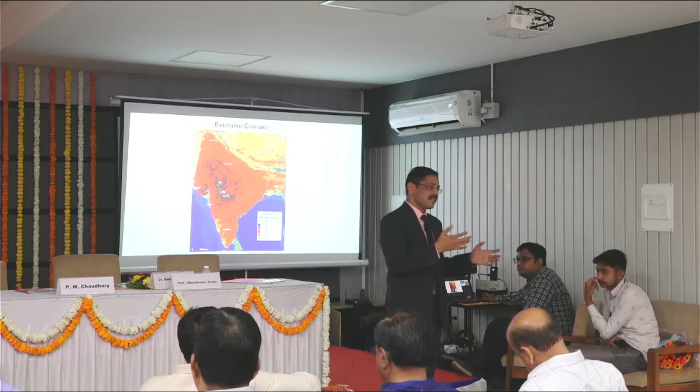In fact, the temperature is going even up to 60 degrees Celsius, and air temperature in Gujarat may go even more than 42 or 43. How do we tackle that? That is an important thing. And you must be seeing this kind of failure in many places. The road has been constructed, and within 2 or 3 years you may see the failure has come up.

And if you ask the reason why it has happened, if some of you are involved in the construction of the pavement: overloading has caused this issue, the subgrade is a problem, the contractor has not done a good job. There are 100 things you can blame and not find the answer at all. But we need to figure it out. What exactly happened in these 2 months? What has happened to this road? You may see the crack. The pavement looks good, but it has cracked. We have invested 100 crores, but again we have to invest within 1 year. Again you pump more money. Again the material cost, resources, manpower, funding, budget, policy, everything will change.

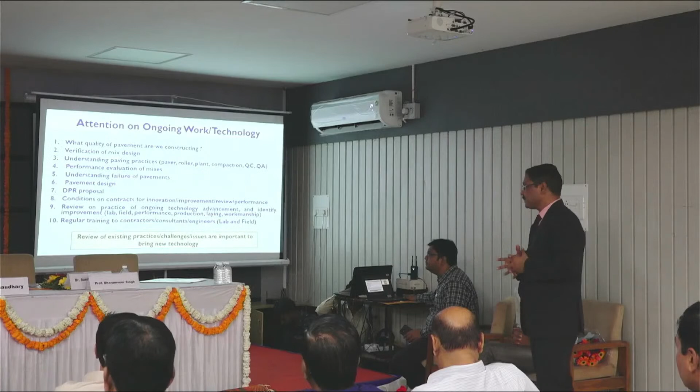This is what we have to understand - what quality of pavement are we constructing, and the verification of the designs and implementation part.

This morning I was having a discussion with one gentleman, and we were thinking everything is going as per the plan, but reality keeps on changing. The ground realities are different, and there are a lot of issues, because the contractor has pressure - political pressure, time pressure, budget crunch, safety margin, cost margin - and everything has to be kept in balance. So you may find some compromise has to be done sometimes.

So what I will do is cover a couple of technologies to show you what's going on in road construction. Maybe you can pick some up and think about how to implement them - think about the implementation side. I will show examples that have been implemented on the ground.

There is nothing fancy being shown here, it's all in the paper - it is on the ground, we have been doing that. And I'll show you the benefits of those techniques. Many techniques are there, and I'm not going to cover everything. There are many techniques if you really want to construct good pavement, flexible pavement.

If you want to do concrete pavement, there are certain techniques. If you want to preserve the pavement, there are certain techniques. If you want to maintain it properly, there are certain techniques. If you want to use waste, recycle plastic, stabilization, there are certain techniques. If you want to do overlay, concrete overlay, flexible, there are certain techniques.

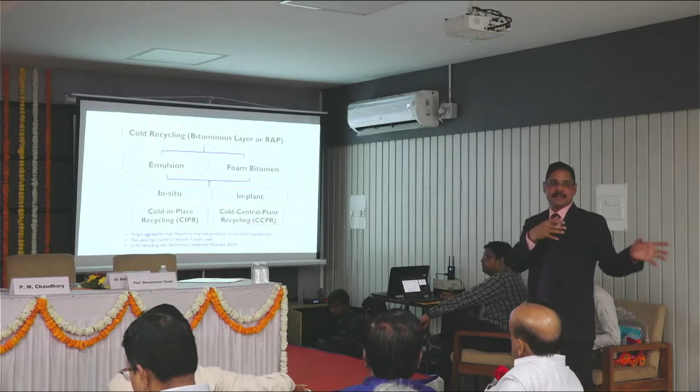This kind of road, no worries—I'll show a case study. This is a case study I got from the field. Usually you see a lot of roads like that, and what's the easiest solution? Just remove it, reconstruct it—forget about it, remove, reconstruct, bring new material and do the construction. Or you can construct an overlay on top of that. Or you can do recycling, which is what I'm going to show you.

This is one of the projects.

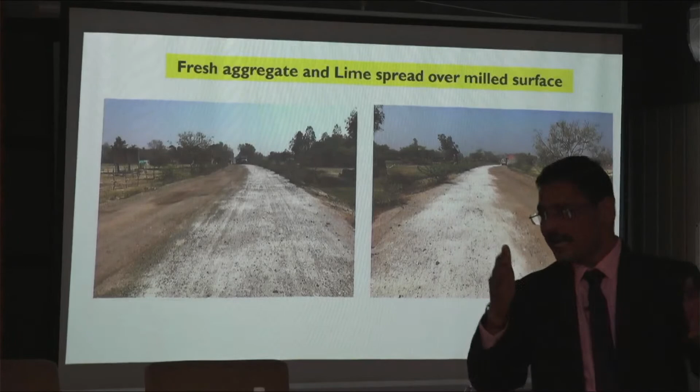You see the existing condition? So next, what we have done is spread lime and cement. It depends actually, but typically lime or cement are widely used. Cement plus lime combination, sometimes fly ash, sometimes lime, depends. Same road, the cement and lime have been spread. Existing road. We spray the lime, we spray the cement, and the dosage has to be designed.

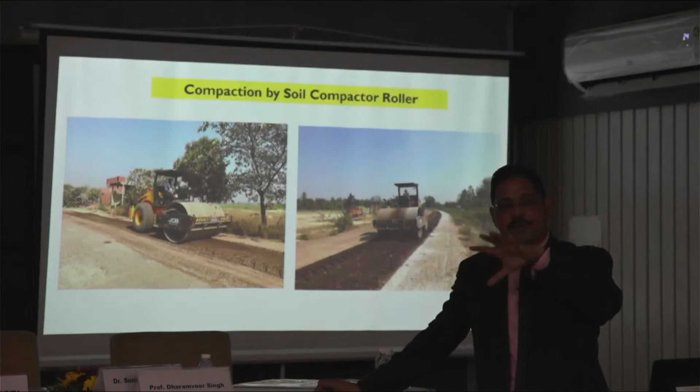And then once the milling has happened, you need to grade it. You need to use the grader just to make the profile, because the layer is coming on the top. Correct? And then you roll it. A big roller is required. You cannot use an 8-ton roller. A roller has to be at least 18 to 20-ton, because the mix is cold and you require big weight. We have seen people using 8-ton rollers or maybe sometimes other rollers - it's not going to work. Even though you are using the technology, you are not using the proper tool to execute it. So it's very important that you understand how to execute it.

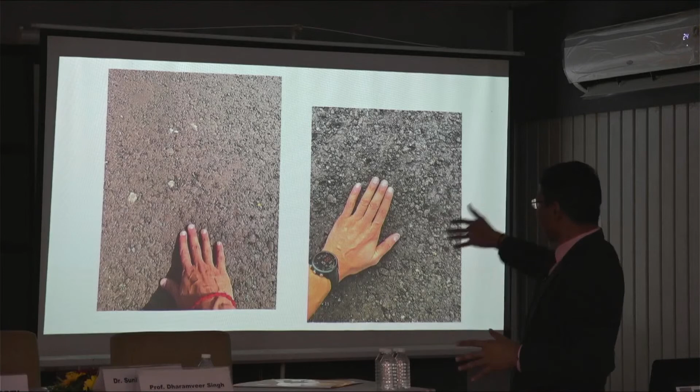Since there is an emulsion, if you see the left side picture, it looks little brownish in color, coffee color kind of thing. But after a couple of hours, it turns black. The emulsion breaks, and after the emulsion breaks, you can see the black color, and it looks like a brand new road.

And there is a material saving, a transportation saving, machinery saving, and everything. All these kinds of components are going to help you optimize the cost. Next, this is how things look like. After that, you put a thin overlay - maybe 30 mm, 40 mm, depending on the design - and your road is brand new. You have used hardly 10% new material, and you have used existing material as it is.

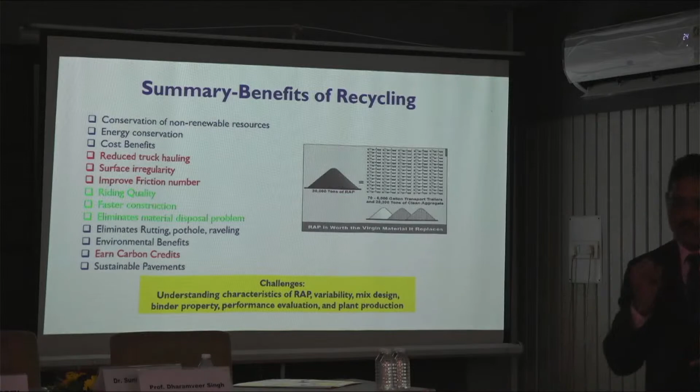So these are the benefits. If somebody is using recycled material, a lot of benefits are there - environmental benefit, cost benefit, material benefit, good roads, maintenance free. You can remove the distresses that are there, you can rectify all the causes for the distresses.

Okay, there is another technique which I am going to tell you about - stabilization. Remember, recycling is hot recycling or cold recycling. Stabilization starts from the bottom. You can do subgrade stabilization, you can do aggregate stabilization, and you can improve the quality of the material. Go next. This is what it is.

If you have a stabilized material, for example, there is unstabilized granular base, there is stabilized. Once you stabilize something, definitely the property will improve. You can add cement, you can add lime, you can add fly ash plus cement together, either in subgrade, or in aggregate, GSB, WMM, and you can improve the quality.

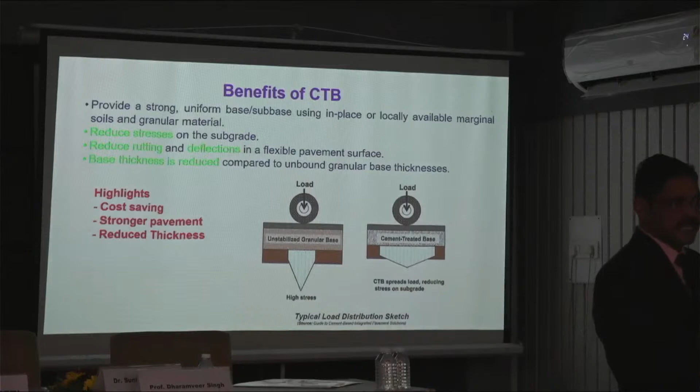Why does it have to be improved? Because there are certain benefits. The pavement is going to become stronger, moisture damage is not going to happen, cost saving is also going to happen, and it is in practice nowadays in India. Yeah, these are the benefits.

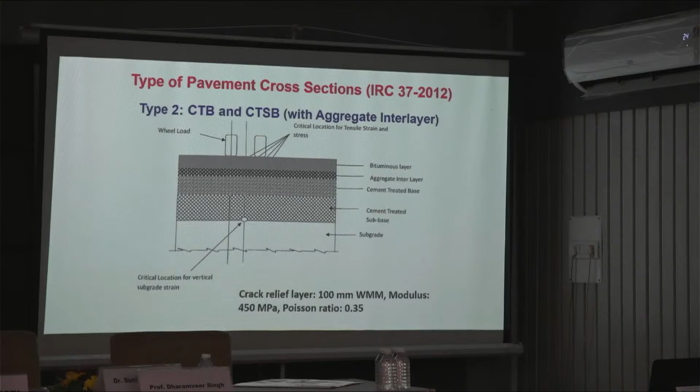In many places we have seen the water table is quite high. The water table is quite high, it goes into the subgrade and then GSB and then deformation happens. You can break that, you can cut it off. If you do good stabilization, quite possibly you can cut it off. So water is not going to come into the other layers because the capillary action has been cut off. Go next. These are the designs as per IRC 37/2012, but you can always design the pavement.

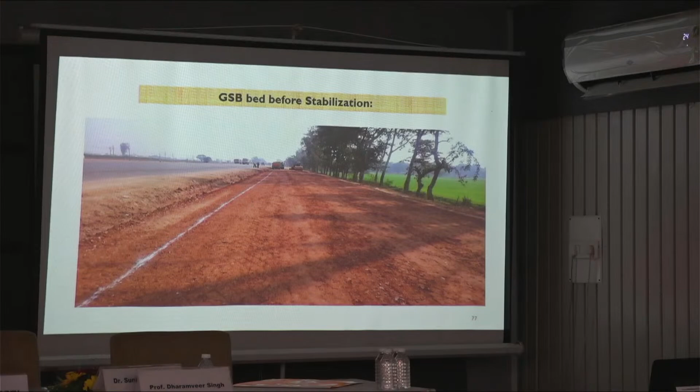This is one of the projects, again I will show the field example, where we have done it and how it has been done. That is more important, whether it is in practice or not. Go ahead. Again a similar kind of machine, this is GSB, granular subbase, which has been dumped on the side. Next, you spread it. This is the bed, this is how it looks. GSB, spread it, compact it.

Then you spray the cement on that, or lime, depending upon what kind of combination is going to work for you. This is how the cement has been spread. What we are doing here is stabilizing the aggregate layer. Why? Because we wanted to reduce the cost. Or your aggregate quality is not good. You wanted to improve the quality of the aggregate, in fact, the quality of the layers. Therefore, we require this kind of stabilization.

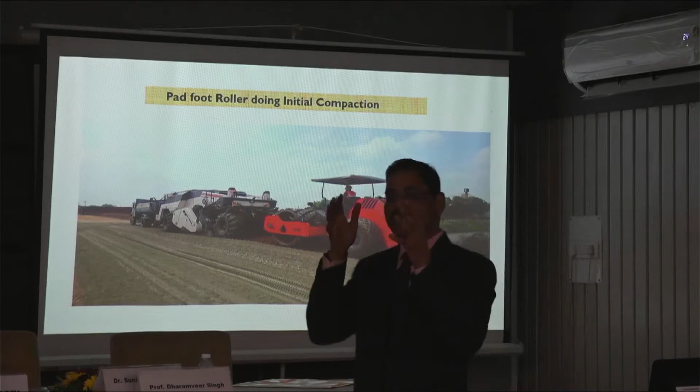Go ahead. Again, a similar kind of machine, in situ. You can do it in the plant also. It is not always in situ, because this machine is going to cost you maybe 10 crores. It's not necessary that you always do it in situ. You can always do it in the plant also, depending upon the logistics. You can use the WMM plant and all these techniques.

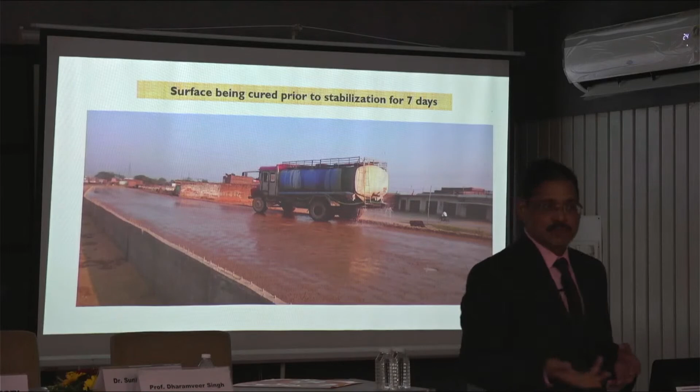Go ahead. Again, the grading is happening. Rolling. Again, the heavy compactor, you require 20 to 24 tons, so that it can compact properly. This is how the bed looks. And this is how you check the quality of the compaction or the layers. And how the curing has to be done, because there is cement in it. Around 2 to 3% cement is quite enough. But if you want it a little stronger, then the cement dose has to be increased. Maybe 4%, maybe 5%.

And this is how things look. Very strong layer. It's not going to deform. Very strong foundation. And on top of that, if you put recycled material, for example, if you have RAP material somewhere, you are saving here, you are saving there. A combination of recycling techniques can be used. In some projects, if you combine recycling techniques, you may save even 60% cost. But yes, execution is important, planning is also important.

Again, similar soil stabilization, go next. This is one of the projects I will show you, soil stabilization. Aggregate stabilization, now soil stabilization. Because sometimes the soil foundation is not good enough. You have poor soil. You cannot construct a good subgrade. We have to stabilize it. On some of the highways it is going on. See how the subgrade looks.

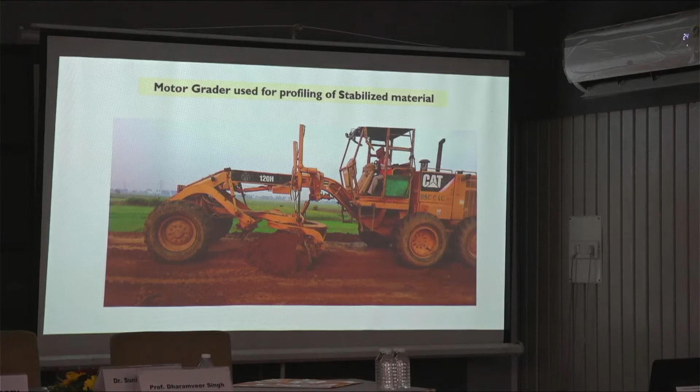Next, roll it, compact it, see how it looks. Your CBR improved, your moisture damage characteristics and strength improved, your pavement thickness has been cut down, your cost has come down, your life cycle cost is going to come down.

And you check the density. So next.

So what we have covered so far: recycling we have done, cold recycling in the plant, cold recycling on the site. Then what we have done: stabilization of aggregate layer, stabilization of subgrade layer. So we have covered stabilization and recycling. These are the two very strong pillars nowadays, and they can be implemented depending upon what kind of project you have. And whatever material is there, you can use 100%. There are some other techniques which I am going to cover.

By the way, I am not going to cover a lot of things on the white topping and short panel because Patanjali is going to cover that. He may tell me don't cover that, I will cover everything. So I will cover it a little bit briefly, but keywords. If you will cover that, I will be enriched. Yeah, a little bit. Yeah, go ahead.

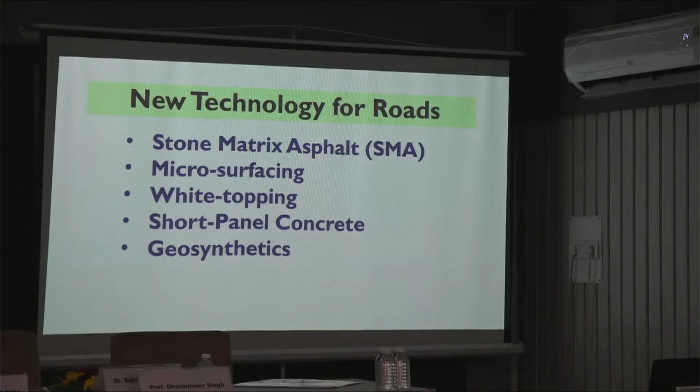By the way, many of you must have heard about this particular technique, SMA, stone mastic or matrix asphalt. If you have not heard about that, this is the time, because this particular mix or technique can help you if you really have rutting issues, or if you have moisture damage sometimes, and there is no option to go for the concrete road. Then this is the technique which you can also think about. Go next.

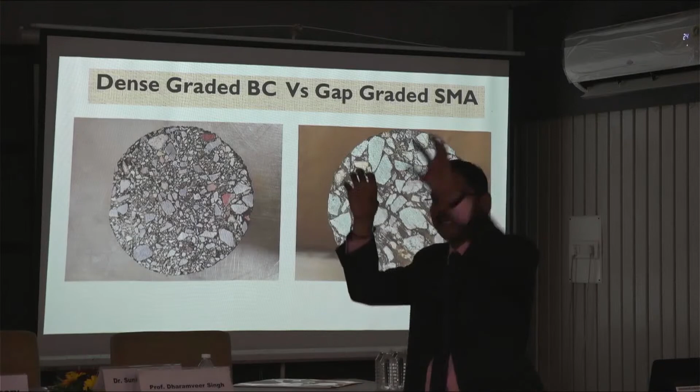In your SMA, all the coarse aggregates are coming together. And in your BC and DBM, one coarse aggregate is here, another is here, another is like this. They are floating in the matrix, but here they are in stone to stone contact. So once the load is applied on this one, there is a lot of chance that it will not deform. But here it will deform. So if you have heavy loading, high temperatures, high chances of rutting, then definitely SMA is a good choice.

And you can think about how to build a road. In fact, this is the practice now. Delhi-Vadodara Expressway, which is the perpetual pavement, the top layer is SMA. The Chennai-Bangalore Expressway, top layer is SMA. Another, Delhi-Katra, top layer is SMA. Nowadays, SMA has boomed. But we have also seen SMA being misused on many projects, and it also fails. So again, the technology alone is not going to help. Implementation is important. How do we implement that? So next.

There is a new word. Technology is not to be blamed. It is the intentions, how you apply it. Yes. Absolutely. Intention. Yes. And this is the example.

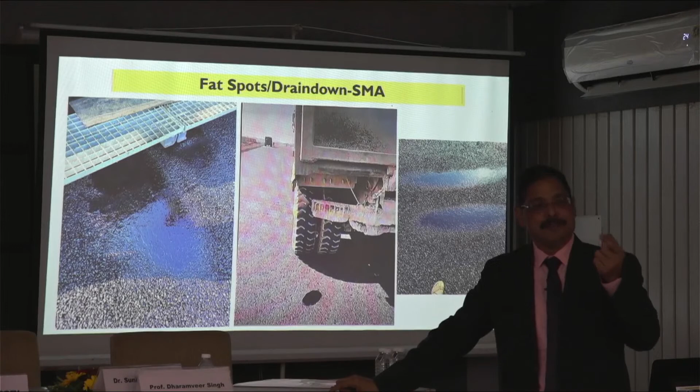On one of the projects where SMA was used, the truck was loaded, and you can see the bitumen is dripping out of the truck. Have you seen bitumen dripping out of a truck? It should be impossible. If bitumen is dripping, it means the bitumen has become liquid. If you kept a container, maybe after half an hour you would see it half full. And if that happens, definitely the road is not going to work. This is the nature of SMA. If you cannot handle it, then there is a problem.

And there are a lot of fibers in the market now. Use this fiber, use that fiber, use this additive. In stabilization also, a lot of additives are there. Somebody has a liquid, somebody has a powder, somebody has a different color liquid, and they say use this, use that. But I tell you what, if you go anywhere in the world, the US, Europe or somewhere, the most utilized additive is cement.

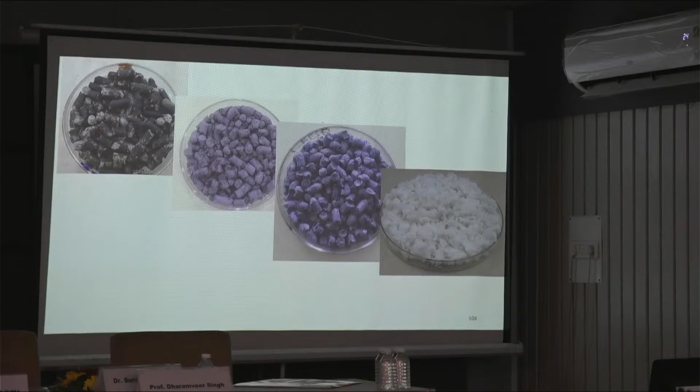Likewise, with fiber, a lot of fibers have come in the market. Some fibers are working, some fibers are not working, some fibers are getting burned in the plant, and then you see the issues coming up.

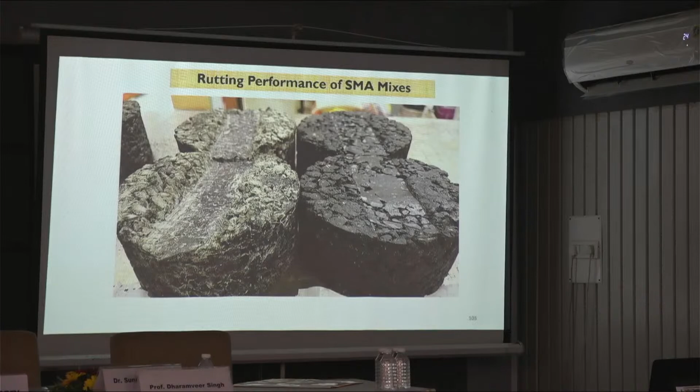Microsurfacing, you all must have heard about that. It has been used quite widely now for preservation. But we have also seen people misusing this particular technique. They think preservation means you can preserve anything. Concrete road can be preserved using microsurfacing. Bitumen road, rutting, cracking, any issues can be preserved using microsurfacing. Those are the claims actually. Overloading is there, use microsurfacing.

See, you have to be careful actually. This particular layer is a cosmetic paint on the surface, nothing more than that. There is no structural capability of this layer to handle the load. If your road is good, and you want to make sure that it remains good, you use this. It is kind of a painting on top to improve the riding quality. Remember, to improve the riding quality a little bit, not very significantly. 50 mm, not more than that. Some say if a lot of bumps are there on the highways, use microsurfacing.

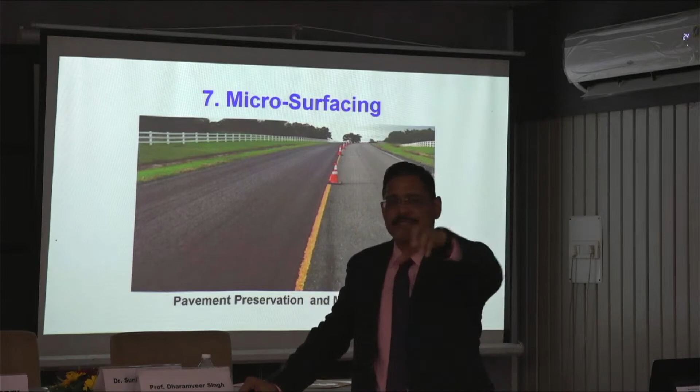In one of the national highways, which is newly constructed by the way, I am giving an example, but I will not name the project. Newly constructed national highway, not open to the traffic. After one rainfall, in 1 kilometer a lot of raveling has happened. Lot of raveling and stripping has started. The agency decided to do microsurfacing in 1 kilometer; the remaining is BC.

I said if you do microsurfacing, your half lane will be microsurfacing, the other will be BC, or after 1 kilometer something else, before opening for the public. And there will be an outcry. Public will say what have you done, different textures. Here micro, here BC, here micro, here BC. Then finally they decided to excavate and do BC again.

Yes, I think it's a good tool, but you need to understand how to use them. But this is a good tool actually. Yes, go ahead. Go ahead, you discuss it.

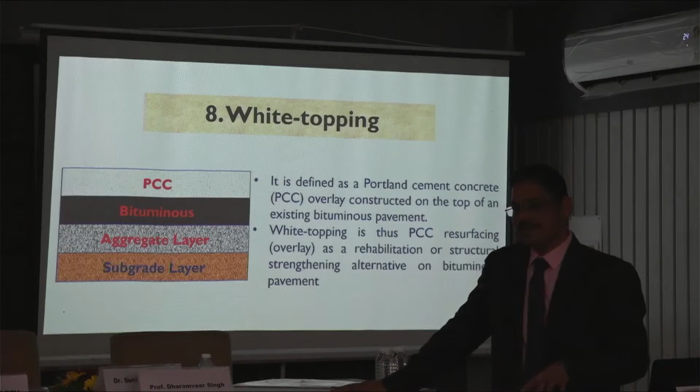White topping I will not touch much, as Pathakji is going to cover it later on, but a lot of white topping has been done in India. In fact, it's not a new technique any more. And it is proven that this technique is going to help you. And we have also seen the other side. In many projects we have seen failure because of misuse of the technique. The design was not good. Existing surface was not good. And then it collapsed. That is also possible.

In white topping, there is your existing bitmix layer, and on top of that you put a PCC layer, which is 1 by 1 meter or 1.5 meter panels depending on the site. So a lot of projects are there. I think this is from Pune somewhere. Yeah, go ahead. There is another technique called short panel concrete.

And this is, I think, in one of the projects, existing bitmix road. Please listen carefully how the technique has been renamed, how smartly people have renamed the technique. Existing bitmix road, tender says UTWT is to be done. UTWT means ultra thin white topping. Existing bitmix road, and on top of that a concrete layer is to be done.

But when you see the construction practices on the site, you know what they are doing? They are removing all the bitmix pavement. They are putting DLC, and on top of that panel concrete, 1 meter by 1 meter. But tender says UTWT. This is not UTWT at all. This is like concrete pavement with short panels, because all the existing bitmix pavement you have removed. Now you are doing reconstruction.

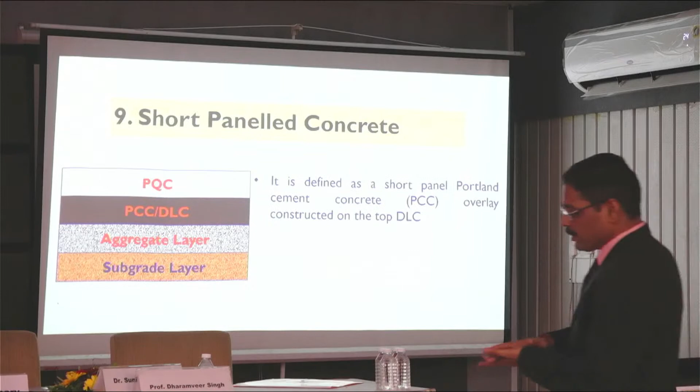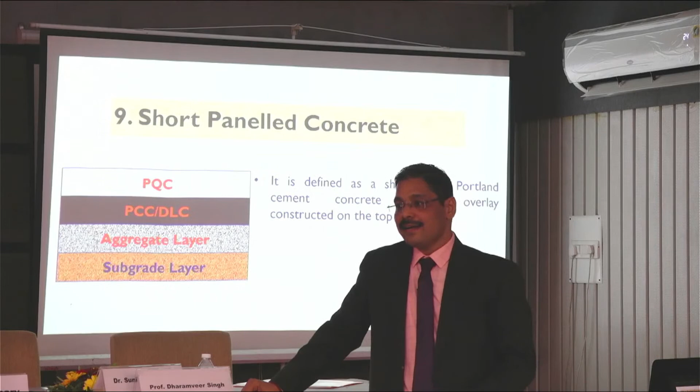In fact, in one of the projects we have seen, the consultant had proposed white topping on the existing bitmix road. But once you construct the white topping, all the shops go below, because your level has gone up. So all the buildings and everything are at least 6 inches down. Therefore, you have to see what exactly the field condition is. We have done this in Daman. Yes, the fort is there.

Next. Geocell also I will not cover much. Maybe Dr. can give some slides, but this is another technique people have been using now. Geosynthetics, application of geosynthetics: geocell, geogrid, WMM, and GSB. But I tell you one example which is completely extreme.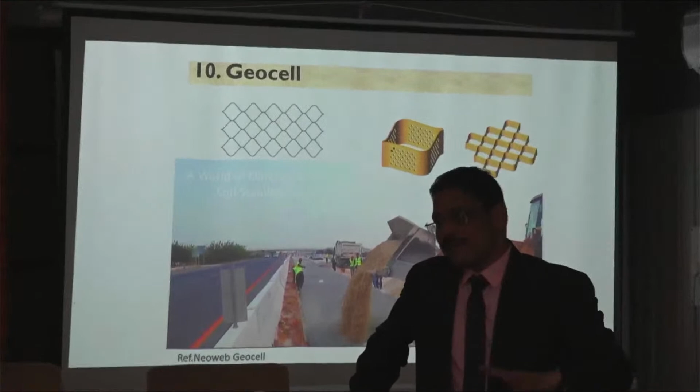In one of the projects, again I am giving a lot of examples of projects which are real on the site, the DBM thickness was around 250 mm, DBM and BC. And one of the suppliers of the geogrid proposed the geogrid into the WMM, GSB and WMM geogrid. Because of the use of the geogrid, the DBM went from 250 to 80 mm.

It is almost like a windfall for the contractor. No contractor is going to say no to that. 250 mm DBM to 80 mm DBM, it's almost 60% saving straightforward.

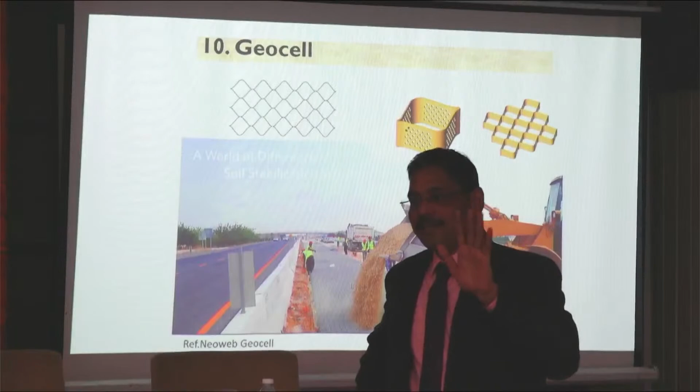Proposal has gone to the agency. That value engineering has been done on this project effectively. We have been utilizing material saving, cost saving is there, sustainable technique is also being used.

The challenges, yes, they have to be overcome, they have to be implemented, but taking 2 hands together, taking 5 fingers of each hand together, and attaining the goals, which are several in nature, not just sustainability, but it is lean management, it is the quality you have to accomplish with the economy and profitability of the organization.

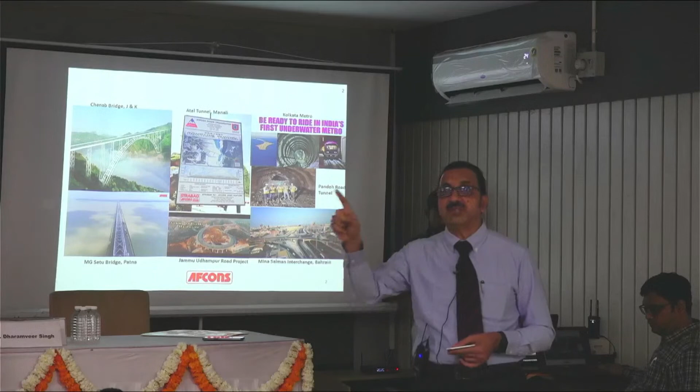Yes, we have the MG Setu bridge. The bridge is a sustainable bridge, we call it, because we have made use of the existing foundations and created a superstructure which is new in nature. Creation of the existing wealth, the use of the existing assets is our duty. Not to demolish, but see whether they can be used for the ongoing and the future projects.

Yes, Jammu Udhampur project, one of the fastest projects, which was initiated about 6-7 years back, and it is the development of NHAI with an ambitious goal. So this is what an infrastructure company is supposed to do, and when it does, the responsibility is very high. We have to take our sustainable goals to an achievable time. Next.

Sustainability, if we define it: infrastructural projects that are planned, designed, constructed, operated, and decommissioned in a manner to ensure economic, financial, social, environmental, institutional sustainability over the entire life cycle. This is a quote from the Inter-American Development Bank, which I found surprisingly a very comprehensive document that addresses the sustainable goals. I put up the references.

Then we have the World Commission on Environment. What is that? The development that meets not just the present, but also enables the future generations to meet their own needs. Next, please. So the four facets of sustainability. Sustainability should address the economic and financial.

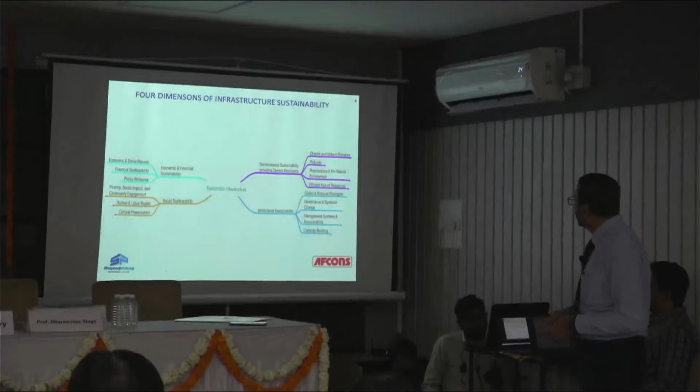It should address environmental sustainability, including climatic changes. There have to be minimized carbon footprints. There have to be efforts to see that global warming, by use of the right material, is minimized. We don't claim that we eliminate. We say, yes, there is a humble effort to minimize the damage we are doing to the ecology.

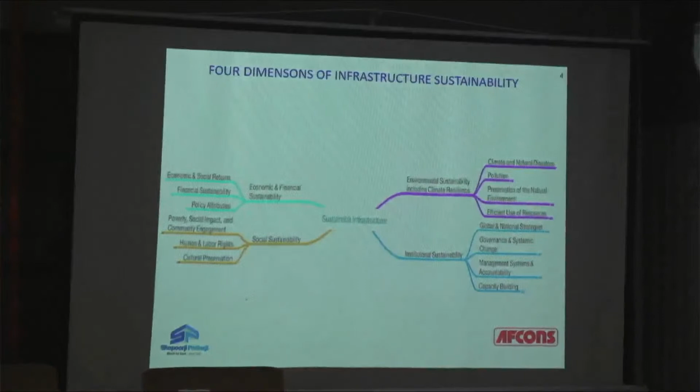Institutional sustainability is something, as an organization, we are responsible for. We should have enough management, enough expertise to address how far we are going to optimize, how far we are going to be part of the reduction process in sustainability, and then how to manage the system with full accountability.

Then social sustainability: whatever steps we are taking, whatever projects we undertake, we have to ensure that all the stakeholders march together. Each stakeholder has to be benefited. Those are the social sustainability goals which we have to inculcate. Next. Next. This is something I need to touch.

Just touch it. Creating an awareness that there are 17 such goals of sustainability by the United Nations. India as a nation has to adopt each and every such goal and align them to the objectives of national development. Start with the United Nations, start with India, you have to align with these goals, start with your organization, start with your section, start with your department, and start with you as an individual.

Align the 17 goals with your daily life. See how much candle light of improvement you can provide to see that our earth becomes greener and sustainable. Next. We as an infrastructure organization, what are our goals? What are our efforts for sustainability?

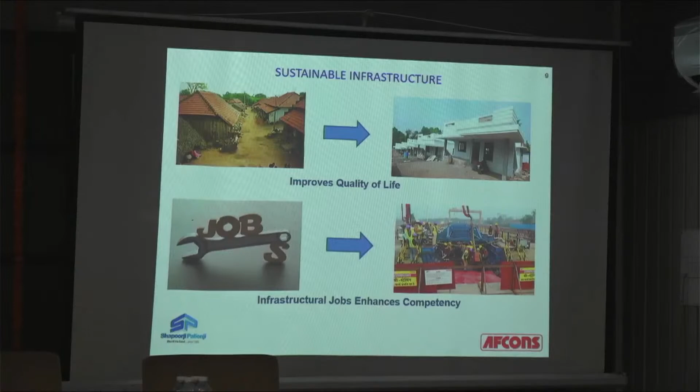Now come to the mechanism, how infrastructure organization has a mechanism of sustainability. Client conceptualizes the sustainability goals for any project. EPC contractor carries out the objectives of the client vision and fulfills all the requirements stated in the contract document. EPC contractor incorporates sustainability in design, planning, resource procurement and execution required for construction, using resources optimally. All design stage, planning stage are deliberated with several options, and we arrive at the least material requiring option, which can be completed in the shortest possible time. The design life cycle is considered using local material, and construction methodology and equipment used are deliberated and optimized.

Incorporating a wellness program at the sites - there has to be healthy man hours, timely completion, and deployment of environmental experts. Yes, we do that, especially in ecologically sensitive locations, where it is essential that we take expert advice in connection with environmental preservation. There is periodic monitoring of environmental parameters and procurement of material from a responsible source. Some examples.

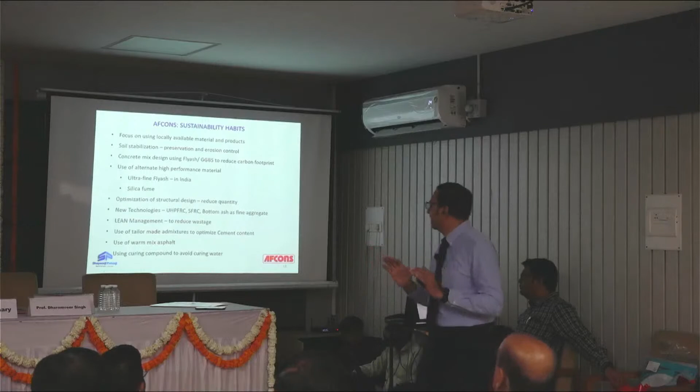Money saved by the contractor is the money that goes into profitability - that is the very plain business of an engineering contract. So use of tailor-made admixtures, let us use warm mix asphalt. Let there be a curing compound if there is scarcity of water in the region.

Same sustainability efforts are applicable for our temporary structures. For every 5-year project, about 3 to 4 months are used for mobilization, and many of our setups are temporary setups. So how can we have sustainable setups? Let us use a container office, grid power directly from the grid, let us avoid generators, let us have solar panels. We have a policy of having solar panels for our labor camps.

We use recycled water, we use natural water, and many times we have a bund constructed so that the water that is accumulated is utilized for construction work. Disposal only by authorized recyclers - we cannot have material disposed of which can threaten the ecology or environment of the vicinity. Let us use construction waste, recycle it, and yes, focus on use of alternative materials like fly ash or even crushed sand. So these are some examples.

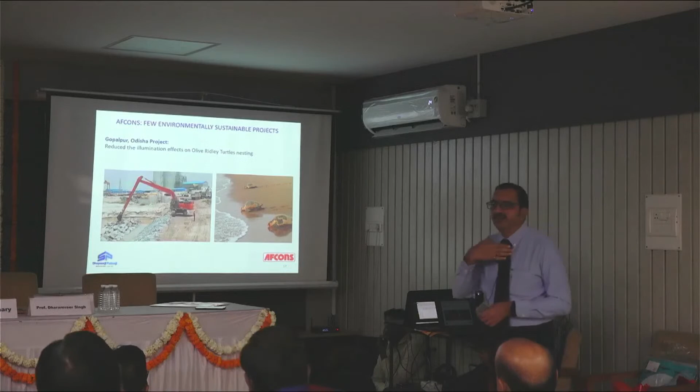Although it was far away, 500 meters is quite far. But yes, there were some lights we had provided for night working which could have been sensitive to the breeding of these turtles. There was a conscious decision made in discussions with environmental experts, the Olive Ridley turtle expert, and we decided to minimize illumination in those locations. This small thinking cannot be quantified in terms of money, but it can be quantified in terms of the sensitivity of an infrastructural agency.

Next. Over here, T-74 tunnel in Jammu and Kashmir. Storage of water by creation of certain temporary bunds from the natural water source, which were used for construction purposes. This is a very common practice. We need not highlight how we are going to construct or preserve the water - that becomes a matter of discussion. But yes, if there are natural sources, use it.

Next, a very glaring example of social sensitivity. Samruddhi Express is an iconic project that connected eastern Maharashtra to western Maharashtra. There are two packages where our organization was involved. In package number 14, when we mobilized, the villagers used to go about 2 kilometers to fetch just drinking water. You can see on the left, the wells are dry. All the ladies spend valuable time collecting water, coming back, cooking. They hardly have any time for any other recreation.

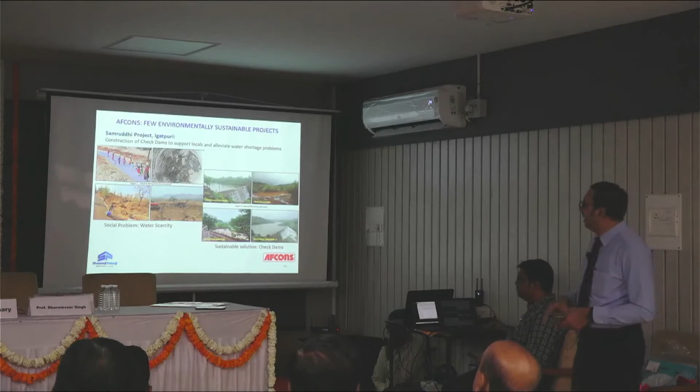This was realized, and we created 4 check dams just to augment the source of water. And yes, we could see the smile in the villages. This is what the reward is.

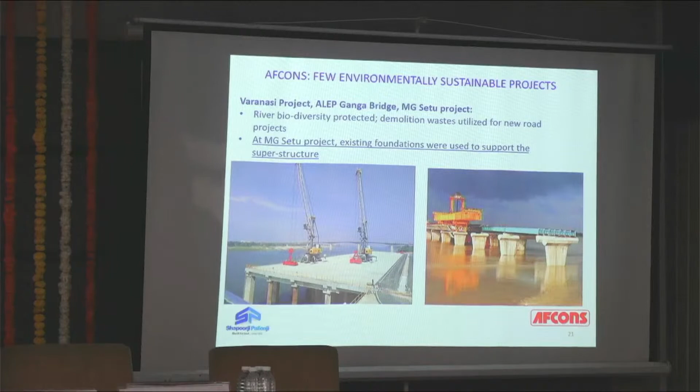At the MG Setu project, as I told you, MG Setu is an example where on the right side you can see the substructure had been used under the existing condition. The structure had been authenticated by a very scholarly report from IIT Roorkee. They came across all types of tests and certified that this material has no distress in terms of environmental damage. Although it had served in the past and supported the concrete or RCC superstructure, and had been subjected to the turbulence of water, it was proved to be structurally safe to take up the superstructure.

We could have had an alternative method of having the RCC structure itself, since it had been proved structurally safe. We could have had it, but no - we went for a fast, progressive steel superstructure. Now this bridge has been handed over to the government of Bihar and is dedicated to the state. This is one of the very iconic examples of how an existing structure can be used for future growth. Remember, the trend is not to be excessively safe.

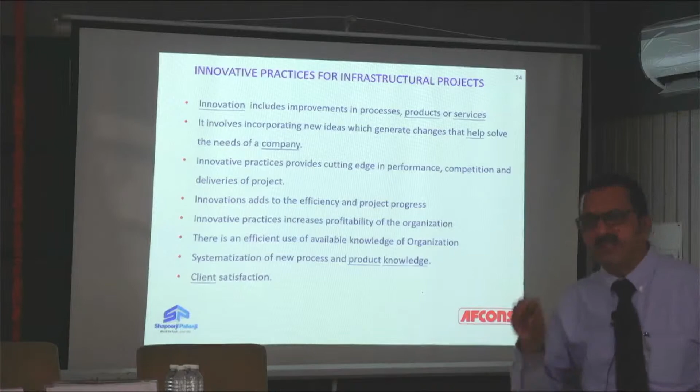Innovation should include improvements in the processes, products and services. When I say innovation, I don't mean R&D - yes, it is R&D, I don't say it isn't, but not like rocket science, which we are compelled to think. Any innovation should bring about the objectives of an infrastructural contract, involving incorporating new ideas and generating changes that can help solve the needs of the company.

Innovative practices provide us the cutting edge in performance. We have competitors - any tender will be submitted by 10 contractors, and we have to incorporate certain innovations which can save us material and time, and give us a competitive advantage. Innovation is to add the efficiency of the project. Innovation practices increase the profitability.

If we don't innovate, we'll perish. The line is as simple as that. Remember Toyota? Toyota had come up with several concepts of management, including the lean management which we talk about. They keep on coming with some concepts of management, and you will see the Toyota vehicle is dominating the global market. Go to a single country and tell me you have not found a Toyota vehicle - this is something not going to happen. Innovate to survive, or else perish.

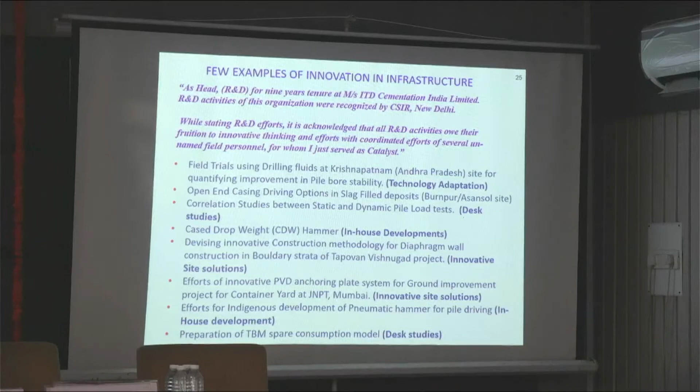Like I tell you, open-end casing driving options in slag filled deposit. If you have to drive a casing in a bouldery strata comprising blast furnace slag, you cannot do the piling normally. For piling, you have to drive the casing, and you cannot drive it in the slag portion or any gravel sources. So what we did: for the casing, we devised a cutter at the bottom, and we devised a rotary movement to the casing so we could rotate it, and the cutter at the bottom could cut the slag pieces to go to the desired depth, and within that we used to bore it. A small thinking, but yes, it can make a difference.

Then there is a cased drop weight, CDW hammer. This is an in-house development.

See, the simple thing can be to lift up the weight and release it. But that can lead to a loss of energy, wastage of energy, more cycles of operation. So what we did, we had a hammer, we provided a casing, we provided a frame, and we provided a damper at the bottom so that the high level of energy is transferred to the pipes. Essentially, the hammer was used to drive the pipe. This is nothing but a simple kind of impact hammer.

But it is our own in-house development with the people in the field; they are very knowledgeable. You just have to identify them. They can come up with a mastery of solutions. So now here,

if we come to the present study in my organization, there is a TBM spare consumption model in which, in all parts of the country, we are observing the progress rate of the TBM in various strata for various TBM machines, and we are compiling it to see what progress rate is achieved, and what the consumptions of consumables, spare parts and equipment related to the TBM machine are.

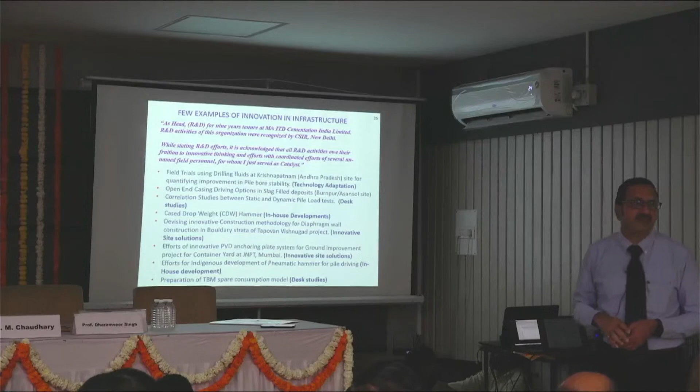If you had gone to that Palm Beach Road earlier, prior to the construction of PVDs, you would have been standing in at least about leg depth of very soft clay. And this is what the technology can provide you. It can support high running loads coming from the traffic. Next.

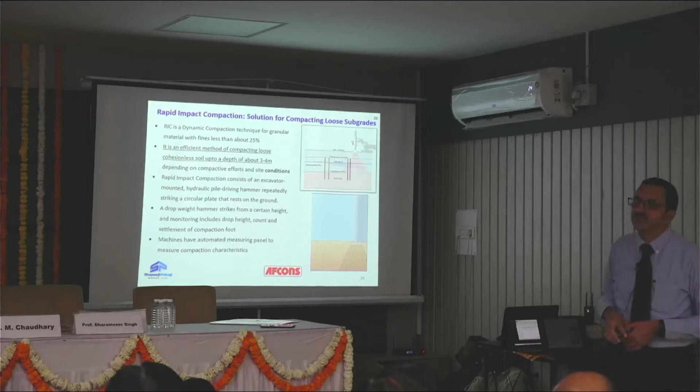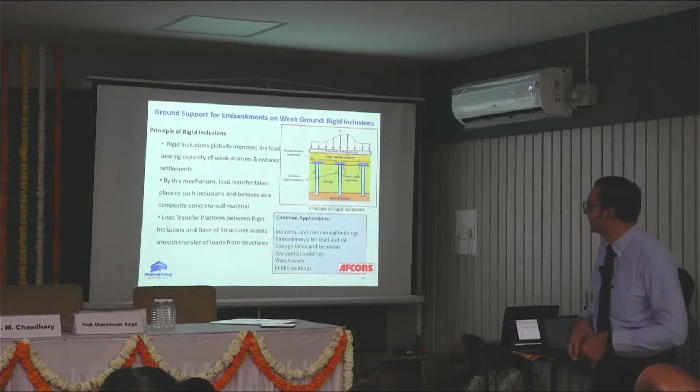Next. This is a picture of the rigid inclusion. Next. Some of the small innovations: use of the bidirectional test, in which reaction piles can be eliminated, the requirements of the blocks can be eliminated. This can be a fast technology for testing of piles.

Next. One of the innovations we carried out at the Lonavala project, an eco-sensitive location. We go there for rains, we go to observe the ecology, the jungles, trees. Let us preserve it, and we had made a small attempt. We would have required an additional pile or concrete block. But during the stage of mobilization, it was not possible. There was no possibility of any equipment going into it. So we have used the in-house available blocks.

We have used the anchors, and this is probably the first time in the globe a small thinking was used to test the pile laterally. A small principle of mechanics, which probably a first year BE student can handle when it comes to the analysis of this load test. You could do it successfully. No patents for this, it is for the general masses. Next.

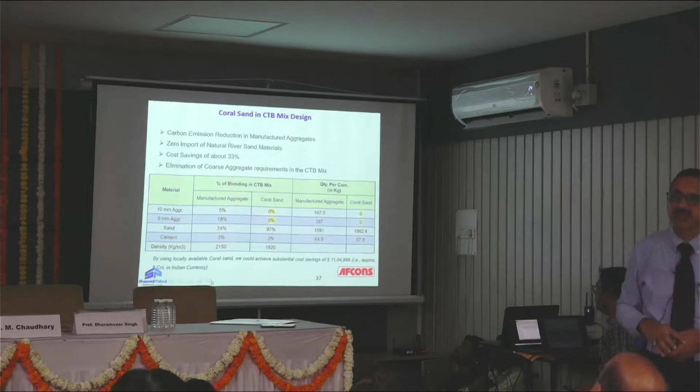Coral sand being a local sand, our plan A decided that we will have sand imported from India through barges, the barges coming from the ports of Kerala. Plan A. Then our management systems compelled us to think of plan B, C, D, and compare them using certain management principles like lean management and the management of choices. Thereafter, we replaced the natural sand to be imported with the local coral sand.

And yes, here we could optimize the requirements of the material by completely using locally available coral sand, which was dredged from the sea. There was a significant saving of 9 crores for us. The project is still ongoing at Addu, which is south of Maldives.

Next, please. CTB, which had been elaborated nicely, is a common and widely adopted concept in our organization. The only thing which we stress is what has to be used in order to strengthen the subbase, in order to strengthen the base, and what will be the resulting thickness of the pavement. If you don't adopt it, you are going to lose the competitive grip.

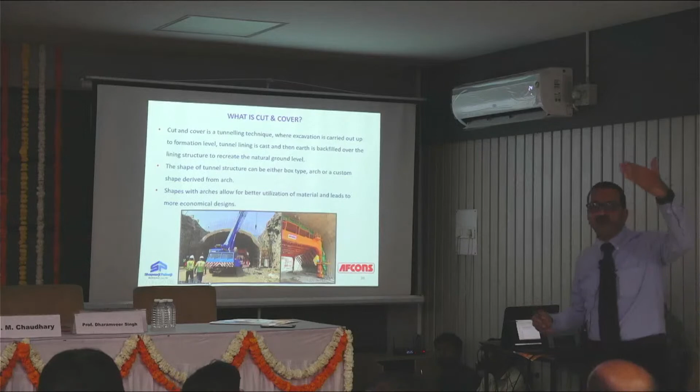Next. An example of cut and cover. Cut and cover portion: you know that before the portal starts, there has to be a certain portion because of overburden, loose overburden material. The portion had to be cut. The portion has to be provided with a cover, which is in the form of an arch or any covering, constructed and then backfilled before you approach the portal. This is a typical requirement.

At Pandu, next. At Pandu, we had to cut a vertical cutting. Actually we had to operate within the ROW; the slope would have been 1 horizontal, 8 vertical. Almost, you can see, it is vertical. That means we have operated within the ROW available. Fortunately, this was a bit of cemented colluvial material. It was able to withstand it for the construction duration.

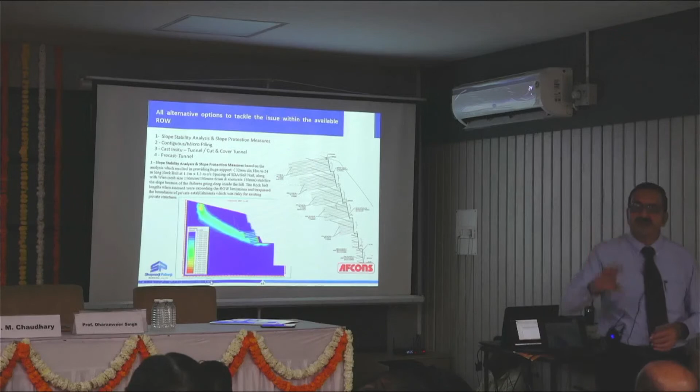We had to study the options. What are the options available? Next. This is the background of the project. Next. This is the cut. Next. Option 1: either you cut as per the ROW, but then you will require a severe population of bolts, bolts of 32 mm diameter running up to 18-24 meters. Not a possibility unless you have a caving and unless the slope is destroyed in total.

Next. Otherwise, the second option thought of was contiguous piles. Mere construction of contiguous piles would have caused distress to the slope. Not a possibility. Next. Then we came to what we adopted for this Igatpuri project, Samruddhi Package 4: have a precast or an actual in situ arch, cut and cover arch, RCC. But if we are going to spend the time on in situ construction, any rain, any laxity in the slope would result in collapse. That is the risk we are going to carry forever.

Although widely practiced in some of the stable slope areas, this was not found suitable in a colluvial type of locations. Next. This is what was adopted, a precast system of blocks, and these blocks were converted into an arch. For you as a bridge engineer, this is a modern technology which is already practiced widely in Maharashtra. Old existing arch bridges are now supported with this technology, which we call a modern arch technology.

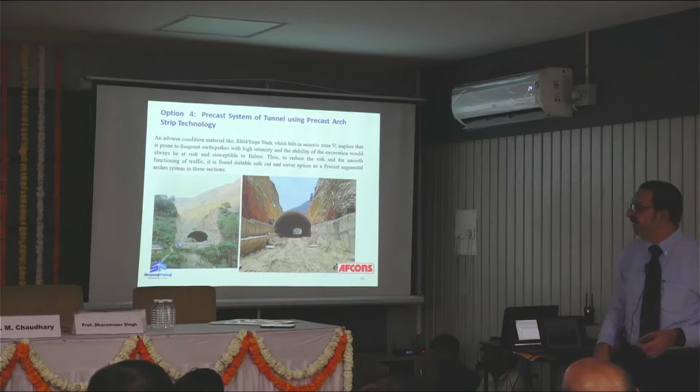Where, next, a system of blocks are precast. The blocks are trapezoidal in shape. Each shape is defined on AutoCAD: what would be the size and what would be the shape. And at the end, these arches will have to be resting on a socket. The last block we call a socket block. And you can see the blocks are cast on the left side. They are being glued, but each block will be connected by cable. You will understand that. Next.

See, now these are blocks which are connected. Before lifting, there is a lifting point. Once you lift it, an arch is formed. See, at the bottom, it is lifted. Now it is going to be ready to be placed. Next. Now this is the story. At the bottom, the in situ concrete is done, in situ concrete at the left and the right side of the slope. It is beneficial for the slope.

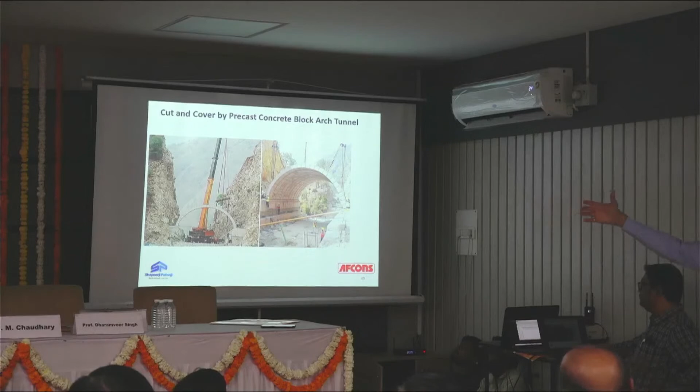The passive resistance from the base is offered, and quickly now we are constructing one arch segment, a second arch segment, and then passing, and we have a complete arch of the first segment. Next. This is the arch in construction. Above that, we have provided a waterproof membrane, and on the right, we have provided a PCC topping, which was part of the procedure. Remember, this is a Swadeshi, in-house technology developed by an Indian and adopted for India.

Professor takes pride in the students. That is the blood. Am I right, sir? Any student who performs well, who renders services to the nation, becomes a favorite of a professor. I've been a faculty member for 16 years, and this is a technology adopted by my student. So this clap is to be conveyed to the student. Thank you.

This is a technology which had been developed not by a single stroke of thinking, but by a continuous source of analysis. And for your information, the technology which was actually adopted for bridges was adopted for the first time in India for a cut and cover portion. This is what we call technology adaptation. A small example of innovation for a more resilient world. So there are certain steps. There had been a planned methodology, and PCC laying on the left and right side of this arch was one of the elements. Next.

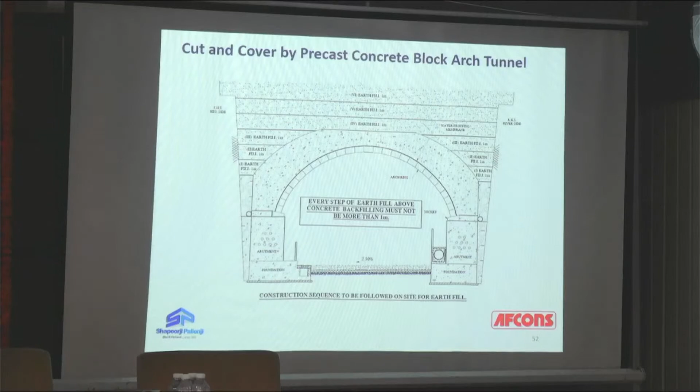Next. A quick look; I'll take 5 minutes more before I close. I know we are short of time.

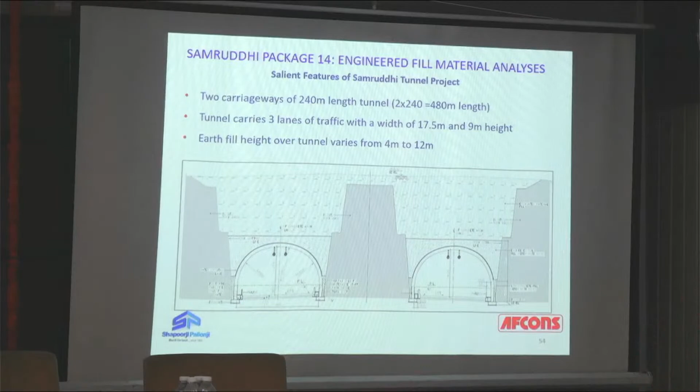So we tied up with our design partner, the Force consultant, and he used the SOFiSTiK software, in which the concrete structure and the backfill soil were accounted for together, just like a husband-wife couple. It was a very successful marriage. The concrete and the backfill soil married together, soil structure interaction took shape, and there was a long-term marriage, a long-term association. And we could see that this marriage culminated in a saving of material for this project. Next.

All stages were modeled in the software. Next. Seismic analysis was also done. Next. And this is what we have, an arch. This is an in situ arch. Contrast that with the precast arch used in Pandu. In situ arch, because you can see there is a basaltic rock, highly stable.

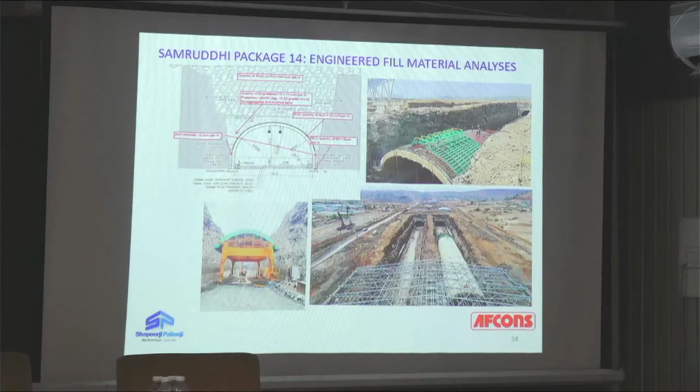Our only aim was to save the material. So what we did, above the arch, the material was provided. We had mixed it with some quantity of cement, and we had assessed the properties to be used in our modeling. The lab properties were used for the modeling, and to our surprise, we found that the stresses on the arch were much, much less. A small thinking, but yes, it is going to be a trendsetter in the analysis of the arch under similar situations.

Next. So this was the saving. You can see using the advanced analysis, there was 27.4% saving in the material. Demonstrated. Because our commercial people in the organization, they are far, far more aggressive in committing the requirements of the same. Next.

There are management tools which we adopt. Our aim is to reduce the consumption of the material, reduce the progress time, and reduce the manpower and the equipment requirement. With that, we have last planner systems. We have choosing by advantages, lean management system. They are part of our management system.

Remember, infrastructure like us doesn't just thrive on the civil engineers, doesn't just thrive on the accountants, doesn't just thrive on the tax consultants, but they also thrive on the management executives. Remember, we have 6 MBAs in our organization dedicated just to the role of optimizing, dedicated to creating a strategic management plan for the next 5 years and so on. Unless we adopt these competitive management systems, we cannot survive in this cutthroat competitive world.

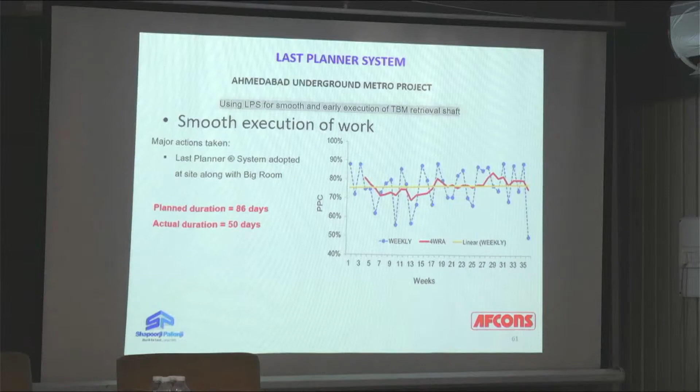So these are 3 examples of management tools which we use and demonstrate in our reports, which are shared with the public in a shareholder meeting, that these are the savings and a culmination of the management systems. Next. Just a few examples. Last planner system, planned duration was 86 days, actual duration was 50 days. This is for the Ahmedabad Metro project.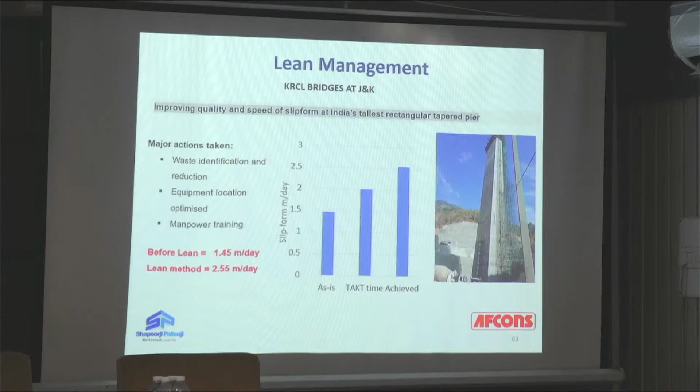The final thing which many of us were looking for, the concluding remarks. Next. I spoke about sustainability. I spoke about the cost optimization and innovation practices which infrastructure companies have done. Let me tell you, here from Ahmedabad, the biggest model of sustainability is nothing but the Sabarmati Riverfront project. What it was before 2005, what it is after, I will say, 2014. There's a big difference.

Otherwise, a river which Indians have converted into a nala, I don't feel ashamed to say this, but yes, all our Indian rivers have been converted

एज इंजीनियर्स हम सबको सोचना चाहिए क्यों नहीं आती, कब नहीं आती, कैसे नहीं आती। वो इसलिए नहीं आती क्योंकि 2008 से आज तक वहां व्हाइट टॉपिंग का ही काम होता है। आप पूरे थाने में घूमेंगे, सिर्फ व्हाइट टॉपिंग मिलेगा और कुछ नहीं, वहां एक पॉटहोल नहीं होता।

इस वजह से साहब ने बोला बहुत बड़ा एक्सचेकर खर्च होता है बॉम्बे में हर साल, वो एक राजनीति का विषय है, उसके बारे में ज्यादा बात करना अच्छा नहीं होगा। तो ये पॉटहोल्स फॉर्मेशन होते हैं जिसकी वजह से जाम होते हैं। हिंदुस्तान में आज तक 11,000 लोग पॉटहोल से मर चुके हैं बरसात की वजह से। इतने आतंकवादी नहीं मार पाए जितना पॉटहोल्स ने मार दिया।

ये वही उसकी रिपोर्ट, ये हर साल होता है, ये बॉम्बे का नॉर्मल फीचर है। ये कोल्ड मिक्स से हर साल रिपेयर किया जाता है और हर साल फिर खराब हो जाता है। ये जो आईआईटी के पास सबसे ज्यादा होता है सर, करेक्ट, ये हर साल होता है, कोई नई चीज नहीं है।

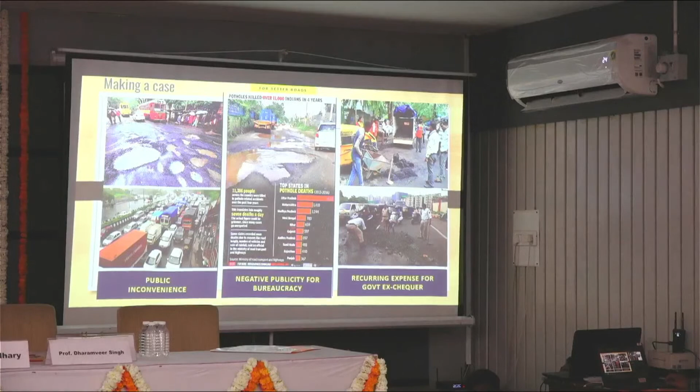11,000 लोग 4 साल में मरे हैं।

अब रटिंग एक ऐसा सब्जेक्ट है जो साहब ने बताया, उसके बहुत सारे कारण हैं। टेम्परेचर डिफरेंशियल है, हमारा देश ऐसा है जहाँ 50 डिग्री का टेम्परेचर डिफरेंशियल होता है। गर्मी में उत्तर भारत में 50 के ऊपर भी चला जाता है और सर्दी में 0 भी हो जाता है। तो रटिंग होना स्वाभाविक है।

तो जैसे मैं हमेशा कहता हूँ, इंजीनियरिंग सब्जेक्ट नहीं है, इट इज ओनली एंड ओनली इनोवेशंस। आउट ऑफ द फॉर्मेट की आर्टिस्टिक थिंकिंग को आप प्रैक्टिकलिटी में लाते हैं इंजीनियरिंग के थ्रू। ये जो बीच के सिद्धांत रहते हैं, लेकिन जब इनोवेशन के द्वारा कार्यान्वित होते हैं तब वो सपने साकार होते हैं। तो ये इनोवेशन है, ये इंजीनियरिंग नहीं है, मेरा ऐसा मानना है। क्योंकि हमेशा कहते हैं कि इंस्टीट्यूट में सिविल इंजीनियरिंग के प्रिंसिपल्स फॉलो नहीं होते हैं। क्यों नहीं होते?

क्योंकि वो इनोवेशन है, वो सिद्धांत थंब रूल है, वहां से शुरू करते हैं फिर उसके बाद इनोवेशंस लगाते हैं। तो ये बेसिकली ये प्रॉब्लम शुरू हुई थी, हिंदुस्तान में असफाल्ट की रोड बननी शुरू क्यों हुई, इसका छोटा सा आपको इतिहास बता दूं।

द्वितीय विश्व युद्ध के बाद सभी इकोनॉमी शटर हो चुकी थी, तो ये हुआ कि भाई कैसे रिवाइव करेंगे। रिवाइव करने के लिए कंजम्पशन बढ़ाइए, कंजम्पशन बढ़ाने के लिए प्रोडक्शन बढ़ाइए, प्रोडक्शन बढ़ाने के लिए एनर्जी चाहिए। एनर्जी कहाँ से मिलेगी? नया नया पेट्रोल मिला है, इसको पेट्रोलियम प्रोडक्ट्स को यूज कर लो। सेकेंड वर्ल्ड वॉर के बाद ज्यादा पेट्रोलियम यूज हुआ, तो उसमें जो बाय प्रोडक्ट्स निकलते हैं उसमें असफाल्ट एक ऐसा प्रोडक्ट है जिसका कोई यूसेज नहीं है अदर देन उसको बोला रोड में डाल दो यार, जो प्रोडक्शन होगा कम से कम मार्केट तक तो भेज देंगे।

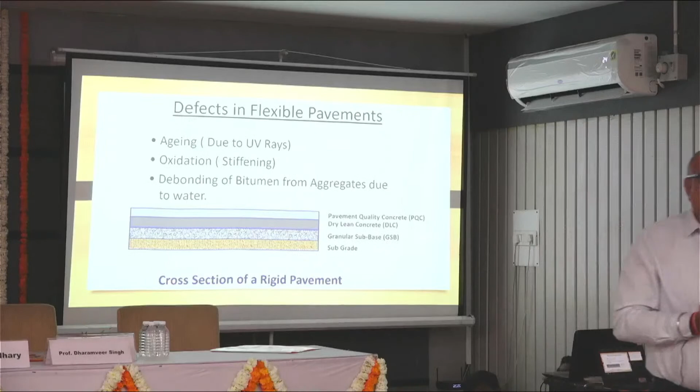तो वाटर पर्कुलेशन रोकना एक बेहद जरूरी चीज हो जाता है, जो कि बीसी से कोशिश करते हैं लेकिन 100% शायद नहीं हो पाता।

हमारे हिंदुस्तान में कुछ 78 लाख किलोमीटर रोड है आज के दिन में, और जैसे साहब ने बताया हम दूसरा स्थान रखते हैं विश्व में हमारे पास मोटरेबल रोड्स होने का। बहुत जल्दी हम पहला भी रखेंगे।

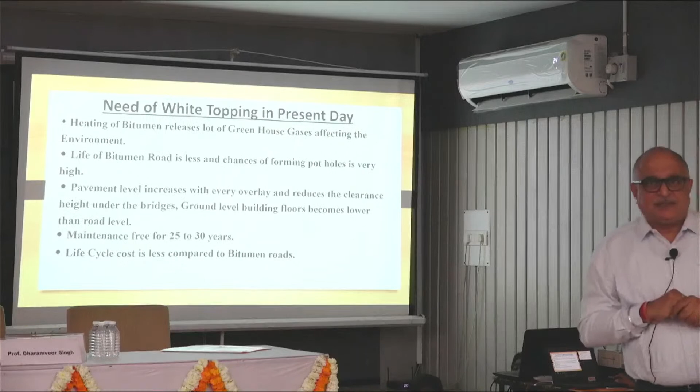लेकिन इसलिए हमारे पास एग्जिस्टिंग बिटुमेन रोड्स है जिसको हम कम खर्चे से सीमेंट रोड में परिवर्तित कर सकते हैं, जिससे कि उसकी लाइफ स्पान सेम है जैसे सीसी रोड है। डिजाइन लाइफ 20 इयर्स है, वी से 30 इयर्स, गडकरी साहब 50 साल बोलते हैं। सीसी रोड की भी ऑलमोस्ट वही है, लेकिन कॉस्टिंग में वो कम है क्योंकि वहां पे मैकेडम जो है वो 200 to 300 mm के बीच में है और यहाँ पे 100 to 200 के बीच में है। तो अप्रोक्सीमेटली एवरेज लेंगे तो 40% की सेविंग हो जाती है। तो हम अगर एग्जिस्टिंग बिटुमेन रोड को ही कन्वर्ट कर देते हैं तो हमारी खर्चा कम आएगा और हमें उसकी लंबे समय तक इकोनॉमीज मिलेंगी।

राइडेबल यानी कि गाड़ी ड्राइव करने का कंफर्ट की कोई न्यूमेरिक वैल्यू नहीं होती है, वो तो हम साइड में करते हैं, वो बोनस है। लेकिन उसके अलावा आपको पॉटहोल्स नहीं मिलेंगे। दूसरा, इसके अंदर आपको हर चौथे, पांचवें या 8वें साल रीअसफाल्टिंग जैसी चीज कुछ नहीं करनी पड़ेगी।

30 साल से भी ज्यादा रहेगा। आपको एक लाइव एग्जांपल बता दें, आप सब लोग एक रोड पे गए हुए होंगे जिसका नाम है मरीन ड्राइव, क्वींस नेकलेस। 1939 में बनाई थी अंग्रेजों ने 33 ग्रेड सीमेंट से। अगेन बॉम्बे भर में पॉट होल्स होते, वहां पॉट होल नहीं होते।

81 इयर्स हो गए, माइनर रिपेयरिंग हुई है उसके ऊपर। सोचिए कितना पैसा सरकार ने बचा लिया। ये पैसा और दूसरे प्रोजेक्ट्स में यूज होगा। ये समझने वाला पॉइंट है। पैसा खर्च करने के लिए नहीं होता है, पैसा बुद्धि के साथ खर्च करने के लिए होता है। अरे मैं गलत करता तो गुजरातियों को बता रहा हूं, ये तो मुझसे बेहतर जानते हैं।

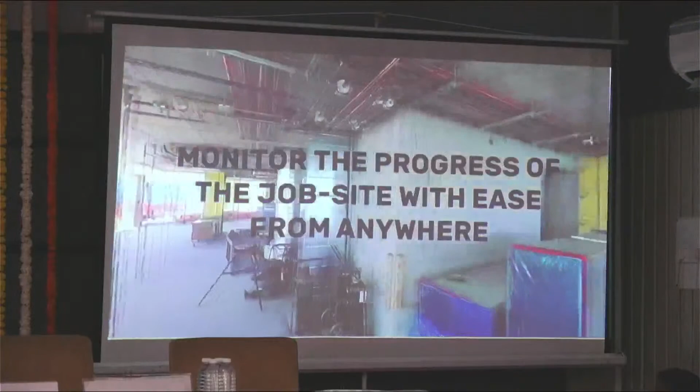So where can optimization be done? From the basement, the parking area, passage area, staircase, washroom, we are wasting lots of energy, right? So how can we save energy in these particular zones? Next, in parking, as we all know, we enter the basement not more than 3 to 4 times a day, right? And we are wasting up to 95% energy.

So what can help next? We can use a number of sensors, lighting sensors, for the lighting management solution. If we use motion sensors and occupancy sensors in the basement area, we can save energy up to 95%, right?

Then we can also save energy in the cabin areas or conference rooms, banquet halls, right? Because most of the energy consumption is in the HVAC, AC. So how can we save energy in the HVAC? Can you go back?

This is all about the smart sensors, occupancy sensors. Once we enter the particular premises, light and AC will be on, and when there is no occupancy, light and AC will be off.